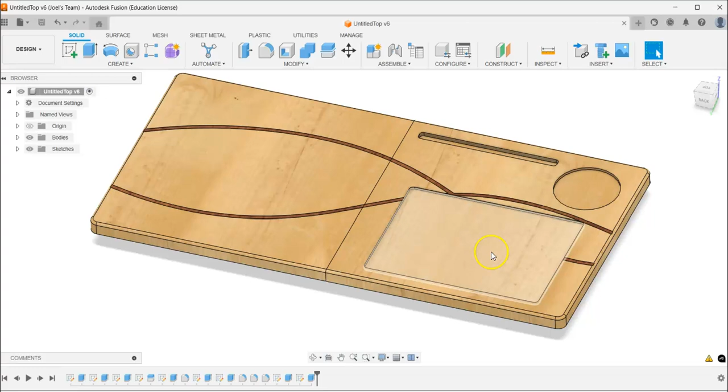One of these files is the setup for the machine and one is a tool store for your library. From here, you guys are going to jump over to your designs. In this particular project, my goal here is to CNC machine these pockets. There's 3 of them, different sizes.

When I design this, it's important to consider the tool that I'll be using. In this case, I'm using a 10mm end mill, so the width or the size of my pockets must be bigger than the size of my tool.

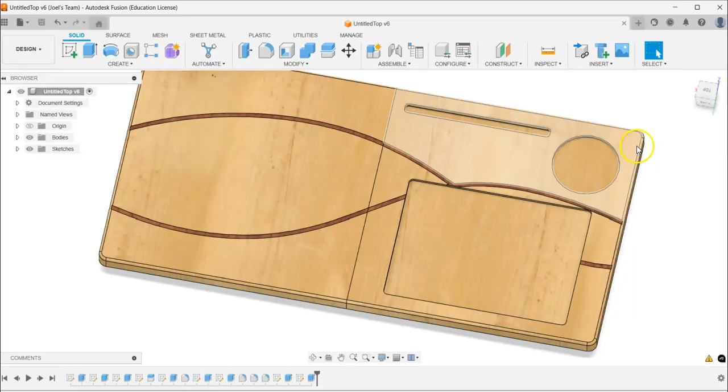Another important factor with design is making sure you've got sufficient room around the outside of the board. I need some room to be able to clamp the board down, so my clamps need to be well clear of where the tool's going to go. A good rule of thumb would be about 25 to 30mm all the way around. Otherwise, you can be careful as to where and how you clamp your work.

In your design, you need to sketch and extrude to set the depth of your pockets. You can add fillets in here as well. The program will do its best to try to work out how to do these, but you can put in some fillets to round the corners.

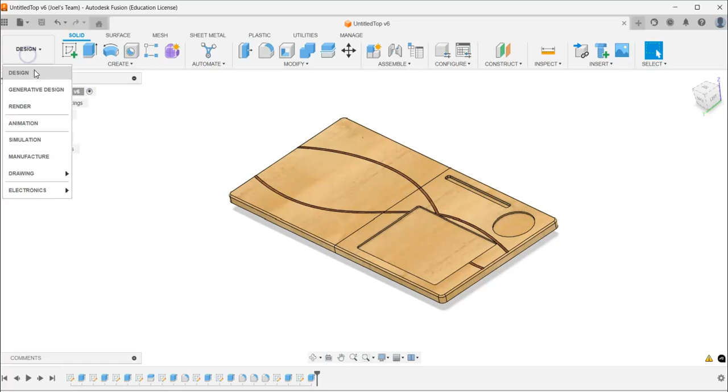Once your design is finished, we're going to go to manufacture. The first thing we need to do is to set up our job using this setup tab. Now there's a few steps to put in here, so just take care following this video. If you miss anything, it could spell drama for your job. You want to be really careful we don't make a mistake because you could ruin your project.

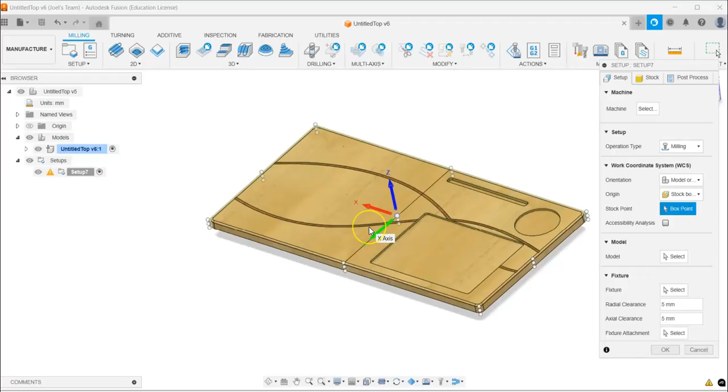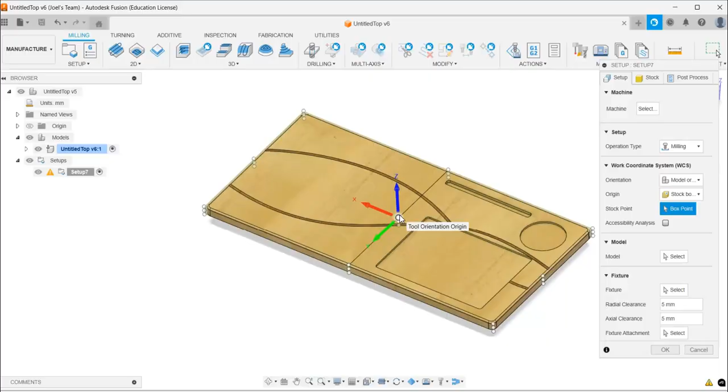First thing we need to work out on this is our coordinate system. By default, the program tries to grab this top central point of your job, and that's actually perfect for us. We're going to draw some crosses with pencil on our work, and we are then going to find the center through that, and we're going to use this on the machine to set up our starting point for machining.

What's really important is that we must set up a correct axis on this project to start. So if this long edge of my board is the long edge of the CNC router, this is actually the y-axis, and then running along this way is the x-axis of the machine. So this coordinate system is currently wrong and I need to change it.

First, check that you have got milling as your process. Here we're going to change the orientation. Best one to use is z-axis and y-axis. Now I'm going to jump straight down to the y-axis to select here.

Now I need to choose a line or edge along the y-axis, so that's the long edge of my part. Click here, you'll see it's now set the y-axis and the x-axis. This is almost correct, except I want to flip the direction. So if I go over to flip y-axis, that there is correct.

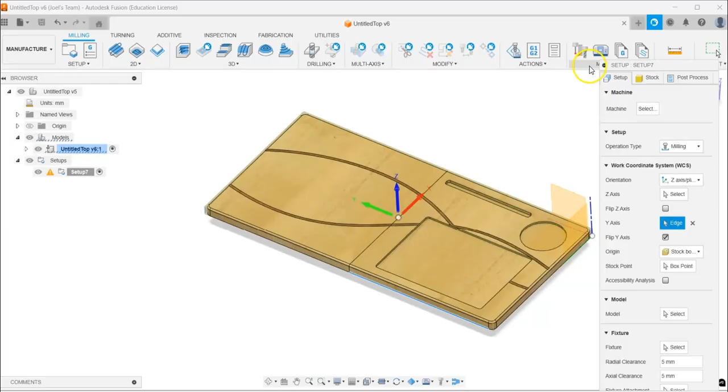So what will end up happening is when you load this board into your milling machine, this corner here is essentially the starting point of the machine, the 0, 0. So x-axis, y-axis, that there looks correct. Make sure your model looks the same.

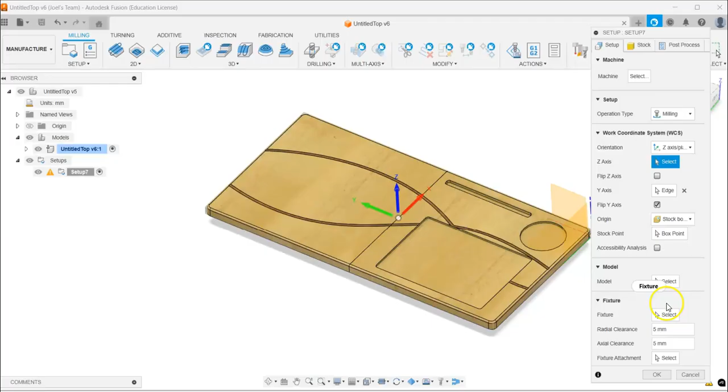Now that that's set, I'm going to go over to the next tab here, stock, and stock offset mode. It is best to set this to no additional stock. This function, for some reason by default, adds a bit of safety material on the outside, but that will affect your final size, so just take that and say no additional stock. That is all in this particular one. The rest of that you can keep as okay.

Now, this little warning might come up. If this is just saying you haven't chosen a model to be used, just go okay, it's just going to select everything inside it. Great, got a tick there for setup. Next step, we are going to add these pockets. We do this by doing some 2D processing, 2D pocket.

First thing we're going to do in this process is we're going to add a tool that we're going to use. Now, click on tool. What we need to do, yours will look a little bit different to mine, but what we're going to do is we're going to add in the St John's Toolstore. I might just delete this for now, I've got 2 extras in here. Yours won't have this in here to start with.

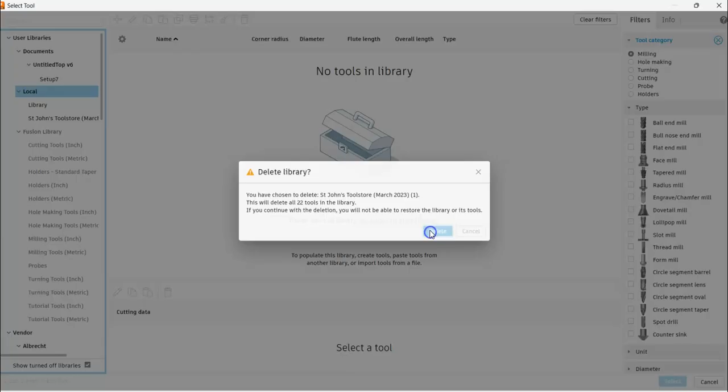To add in the St John's Toolstore, right click or go to local library, right click and go import libraries. Then from your downloads, you're going to find the St John's Toolstore that you have downloaded and add this.

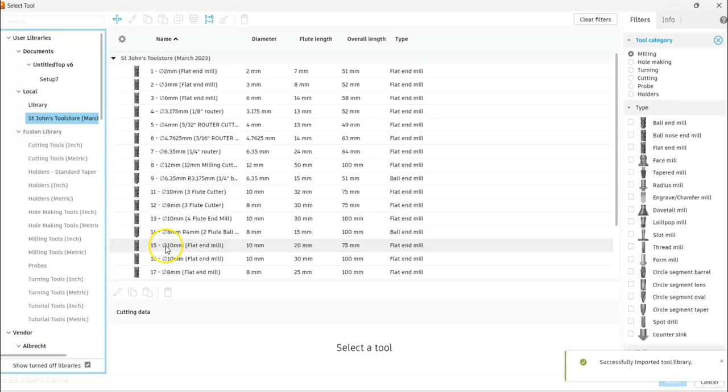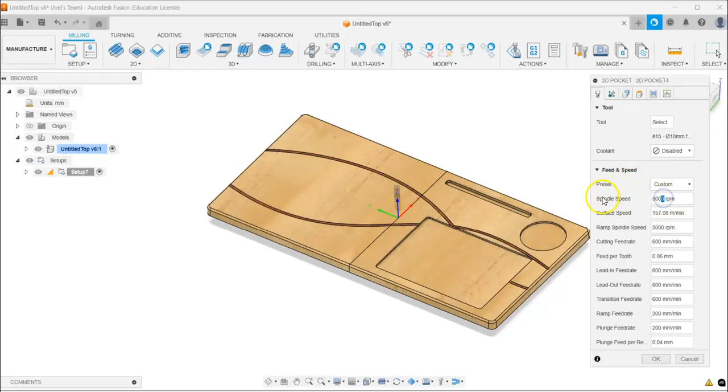And I can also change the spindle speed, this is the speed that the tool is going to spin, to 10,000 RPM. So make sure you've got the right amount of zeros. That's the quickest we can run it, that's going to give us a good result. Now, before you go and press OK, there's quite a few tabs to follow through here.

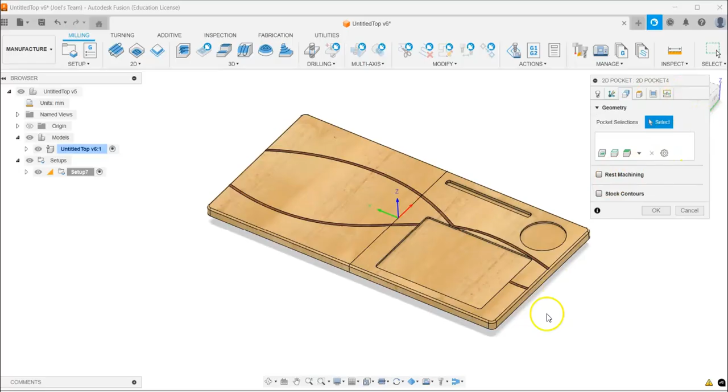So let's be careful about this. We're going to skip multi-axis and go to geometry. Here we're going to select the faces we're going to cut. We can do this by clicking the bottom face of our pocket, or you can choose the bottom edge of what you're going to cut. I can just simply click the bottom face, that's probably easiest.

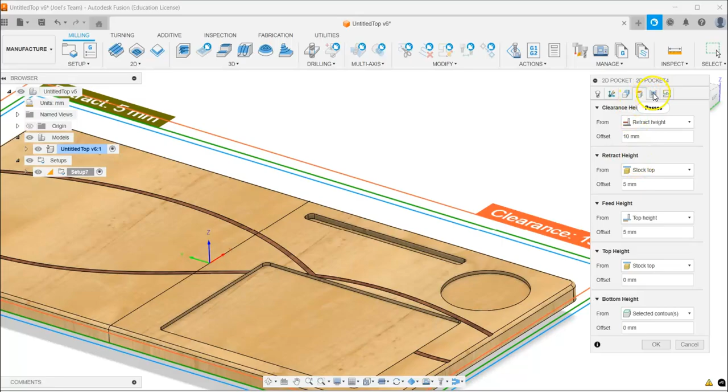Great, click those three. Now the next tab, I don't need to change that height. Over at passes, this is a pretty important one. I'm going to ensure I turn off stock to leave. That's really important, it gives you a little bit of safety if there's any issues, but I don't need that here. Let's remove that.

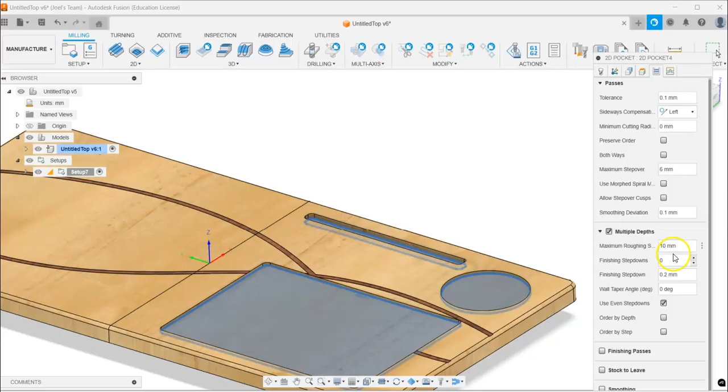I then must click on multiple depths. What this does is set the maximum depth that my tool can cut in one pass. This machine and cutter is pretty good for 10mm, so change that to 10. This is called roughing, so it cuts thick and deep to start, then does a finishing step down if you set that, to give a final smooth finish. This one's okay to cut, it's just one step down, so leave it there. And that is almost there.

All else I can do here is under linking, this one here. I'm going to roll down to the ramp type. This is how the tool enters the work. For soft materials, we can get away with just doing a plunge, which means the tool goes straight into the work and then starts cutting. If you've got a harder material, you can use a helix, that spins the tool slowly into the work. We're pretty safe here with a plunge cut.

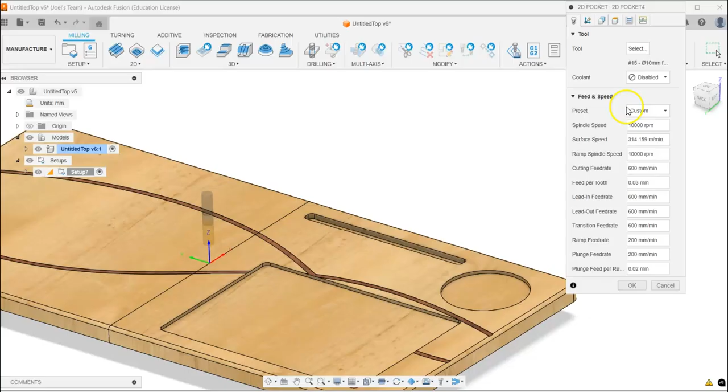All right, that should be all on this tab. Just double check and make sure that they're exactly correct as I've put them in here, and go OK.

Now, very quickly, the program works out a toolpath. This is where the tool is going to go from the start. We're going to check this next by going to Actions and Simulate.

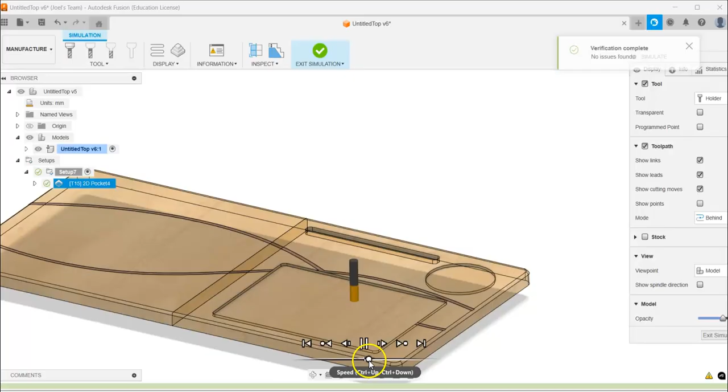Now, over here, I can simply press play to start watching the tool run through its motion. This here's the speed, this little dragger, so it's going to start pretty slow. If you want to speed this up so you can see the whole thing, you can just move it along. And you can see here that the tool's going to be doing these little steps and spinning around.

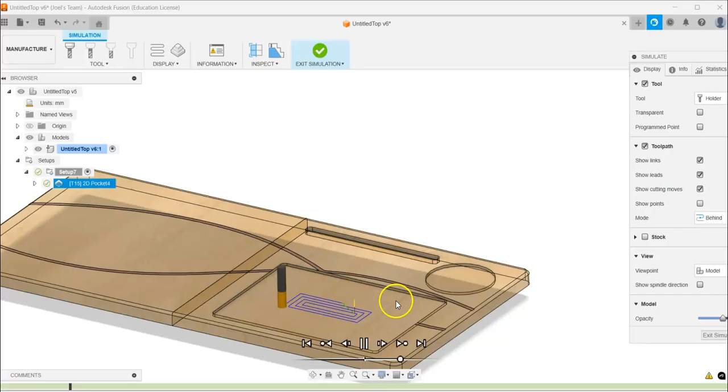You can always go back as well, back some steps, or back to the start. Good to watch this, it gives you a really clear indication of how many passes and where the tool's going to go. So if for some reason it misses something, or goes the wrong way or wrong place, you might have an issue to look at. But that looks perfect for me. I can exit my simulation.

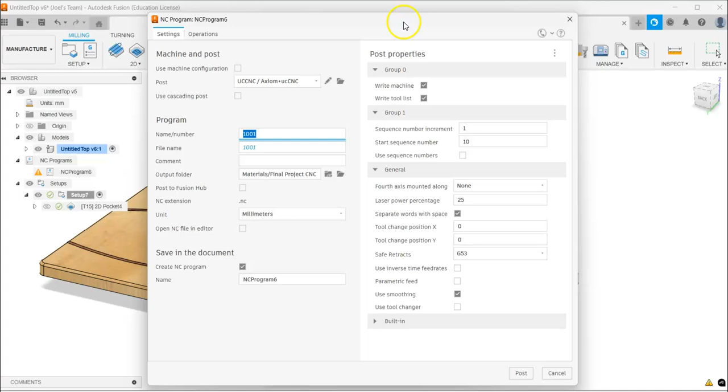Now the very last step is we need to output the file. So we're going to go to post-process. Before we go further, yours won't have a machine set up yet, so we need to go select post from the library. Now this one is the one I've already added, so let's just delete that. Yours will look like this when you first start.

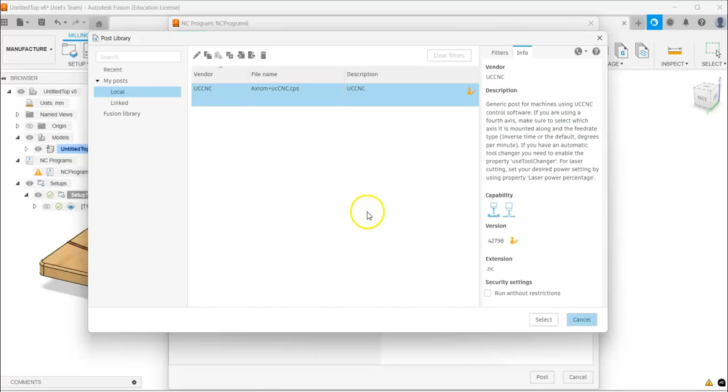Go to My Posts Local, and here we're going to go Import. This is where your downloads are going to bring up the machine. Open. And go Select. That's our machine.

Now the last two steps here is to change your program number. It's good to start by calling it what it is. So this is my top pocket machining, and then it's always important to put your name on the job.

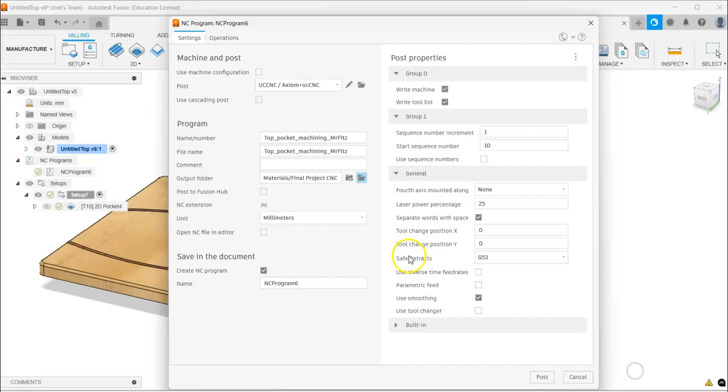If you don't put your name on it, it's going to get lost and mixed up with other students' work. Output folder, this is to specify where you want this to go. Please save this onto your computer to start with, perhaps put it into the folder of your class. Make sure it's in millimeters.

You can write a name of the program, that's just going to specify that in the job. And then that should be fine. Go post, and all going well, you should have 'code is successfully posted'. You can click on this little tab to open up the code.

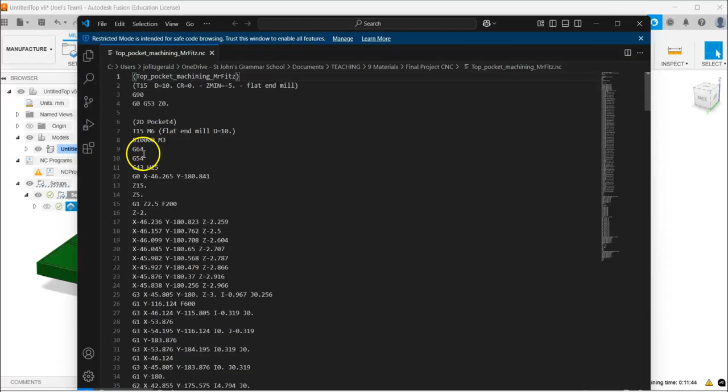What an NC or G code file looks like is this. All it is, is a series of lines of code that tell the machine what to do and where to go. So it's going to start by turning the machine on, start by spinning the spindle, and then it's going to go to a series of X, Y, and Z coordinates all the way through to the end. And that's the code.

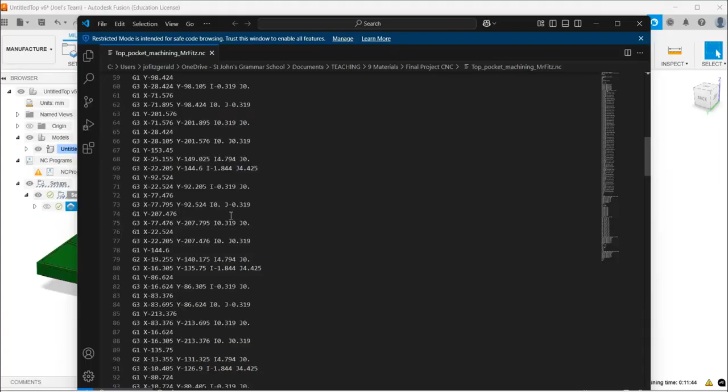So you can close this when you're done with it. And that is done. So that code, wherever you've saved it, you need to speak with your teacher about what to do with that. That particular code will likely need to be copied onto a USB and taken to the machine or the computer next to that which runs the CNC machine. Or your teacher might also specify a particular folder to place that, a shared folder. All the best with your project.